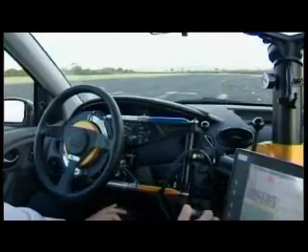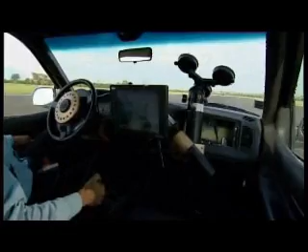Steering robots, such as Anthony Best Dynamics SR30, are now used widely throughout the world to carry out vehicle handling tests on the test track. Typically, robots are programmed to provide a defined input to the vehicle's steering wheel, such as a step or sinusoidal input. A robot can do this task much more accurately than a driver. In these tests, the response of the vehicle and the path that it subsequently follows depends upon the dynamic characteristics

of the vehicle. The objective of this collaborative project between Ford and Anthony Best Dynamics, described in this film, was to develop a steering robot system to drive a vehicle accurately along a defined path. It was a requirement to do this at high speeds and at high lateral accelerations. To achieve this objective requires the input to the steering wheel to be computed in real time, using feedback from transducers measuring the actual path of the vehicle to close the loop.

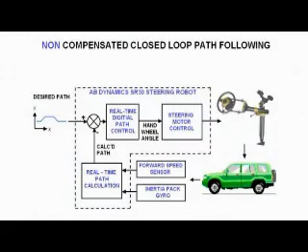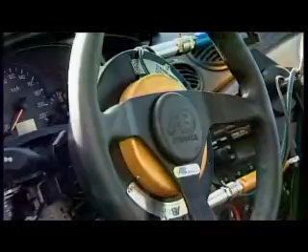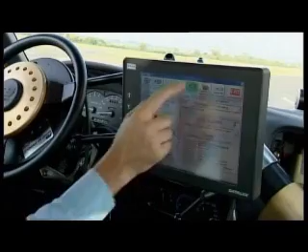The steering robot itself has a direct drive torque motor that is mounted to the steering column of the vehicle in place of the standard wheel. The body of the motor is prevented from rotating by a telescopic reaction tube that is fixed between the car's windscreen and the floor. The motor is driven by a sophisticated motion controller which is mounted in a rugged case. This controller is interfaced to a PC that runs the user interface software. A touchscreen can be mounted on the torque reaction mechanism to allow tests to be set up and run easily by the driver.

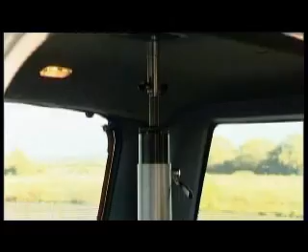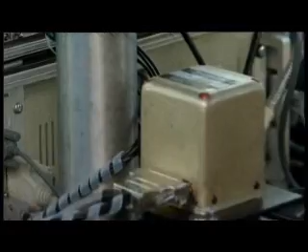The initial development of the path-following system was carried out using a conventional motion pack containing 3 orthogonal accelerometers and rotational rate gyros. In addition, a 2-axis velocity sensor was mounted to the front of the vehicle. The analog outputs from the sensors were connected to the spare inputs of the steering robot controller, so that the path could be computed by the robot. These transducers give a choice of methods for path calculation, the simplest and most accurate being to use the 2 velocity signals from the velocity sensor in combination with the yaw velocity from the gyro.

During the initial testing, it was quickly discovered that the outputs from the velocity sensor were very noisy and were unsuitable for feedback control purposes without heavy filtering. Unfortunately, the filter delay proved to be too great to allow the lateral velocity signal to be used for control. Therefore, for control purposes, the path had to be calculated using the lateral velocity, computed by integrating the acceleration and yaw rate signals from the motion pack.

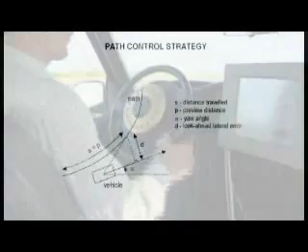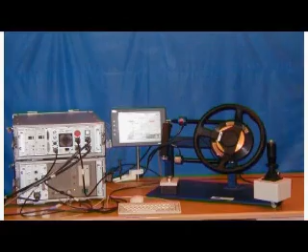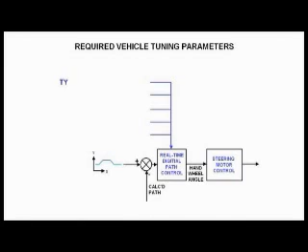A control algorithm was developed, firstly using pure mathematical models to simulate its performance, and then using the actual robot on the test bench. The algorithm uses the heading of the vehicle projected forwards to provide an error signal for an enhanced PD controller. Changing the system to suit a different vehicle requires the fundamental vehicle parameters to be entered. These are tire cornering stiffness, wheelbase, steering ratio, yaw inertia, and vehicle mass.

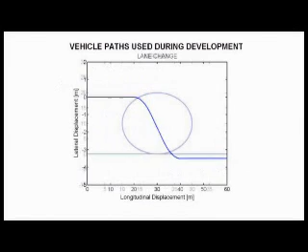A program was developed to generate smooth path definition files for the robot from a simple set of input data. The paths were stored and downloaded to the robot's controller before the test. The system was tested using a variety of paths from a simple straight line to lane changes, slaloms, and circles. As confidence in the system grew, the control algorithm was developed and tuned.

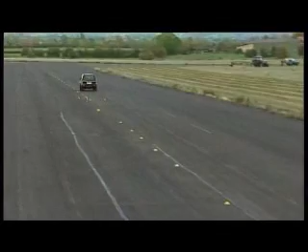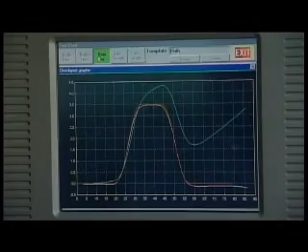There was a lingering problem, however, that of the vehicle drifting off course during the test. This was not an inability of the robot to follow the feedback, but rather an inability of the feedback transducers to measure the path accurately due to integration drift. Results from an elk test show the desired path, compared with the calculated path from the gyro and forward velocity sensor, showing good path following. However, the actual path of the vehicle shows the effect of the integration drift. What was needed was a system that could compute the path without too much delay and without drift.

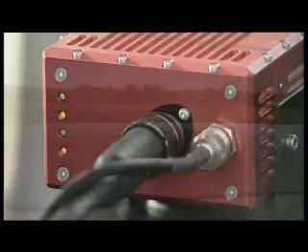Oxford Technical Solutions was able to supply a motion pack with integrated global positioning system, or GPS receiver. The OTS system has a GPS receiver, motion pack, and computer built into the one package. The motion pack has the normal array of accelerometers and gyros which give fast responding signals for computation of the path by the internal computer. This information is then corrected for drift in real time by using the GPS data.

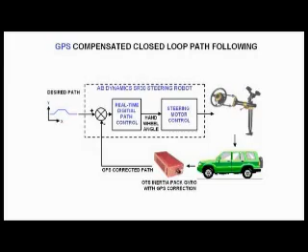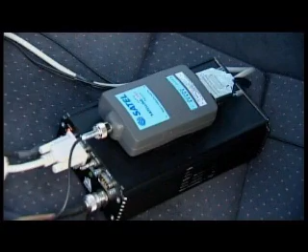Various levels of GPS accuracy are possible, but for our purposes it was necessary to choose the best possible system, which uses a fixed GPS base station connected to the vehicle by a radio link. This gives position relative to the base station with 2 centimeter accuracy.

Extensive work was carried out to enable the OTS system to communicate with the robot. A serial communication link had to be developed between the OTS system and robot controller with reliable data transfer at 100 Hz. The advantage of the new system was not only the elimination of drift, but also removal of the need for the external speed sensor. Driving along a straight path immediately demonstrated the accuracy of the new system and that the drift problem was eliminated.

With this system, a start gate can be placed on the track and the vehicle automatically led through this by the robot, with the test maneuver being automatically triggered accurately at the start gate. Testing with the new system was an immediate success in both types of vehicle that were tested. All of the maneuvers developed previously could be repeated, with lateral accelerations of up to 0.9 g being achieved.

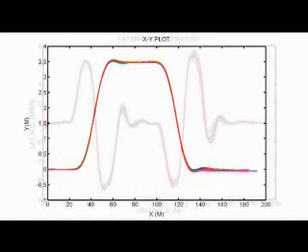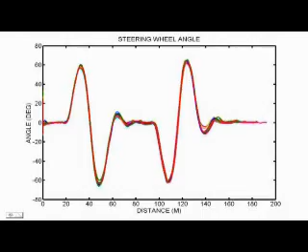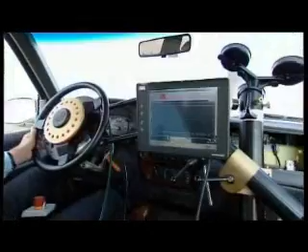From the driver's perspective, running a test is simple. Firstly, the driver selects the chosen test maneuver and presses the start button to download the coordinates of the path to the controller. He then gets the vehicle up to speed and heading towards the starting gate. The robot guides the vehicle accurately into the center of the starting gate and automatically triggers the maneuver based upon the vehicle's position from the GPS.

The system was tested in low-speed maneuvers, such as a 10-meter radius circle and an elk test. High-speed maneuvers, such as lane changes and slaloms, were also tested. Speeds of over 100 kilometers per hour were achieved with lateral accelerations of typically 0.8 g.

We have shown that a path-following steering robot has now been developed for use in repeatable limit handling tests on vehicles. We acknowledge that some further development is necessary to achieve a safe, easy to use and proven system.